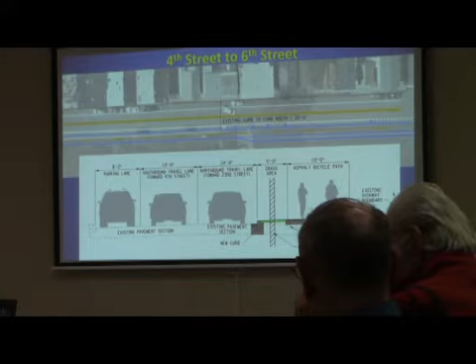Between 4th Street and 6th Street, the existing curb line on the east side of the road, we are planning on removing that and moving it closer to the west side. So you'll have a 5-foot grassed green space area. In that grassed area, National Grid will be relocating their poles that are along this stretch, and the bike path will actually be moved off to the side, so we'll have a good 5-foot separation and a curb between the travel lanes.

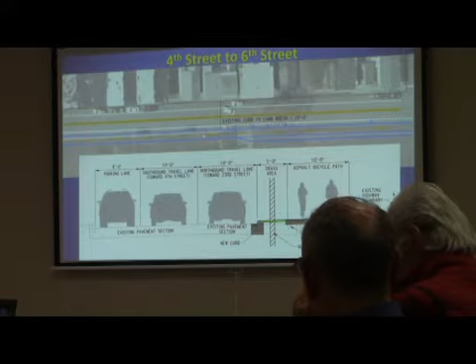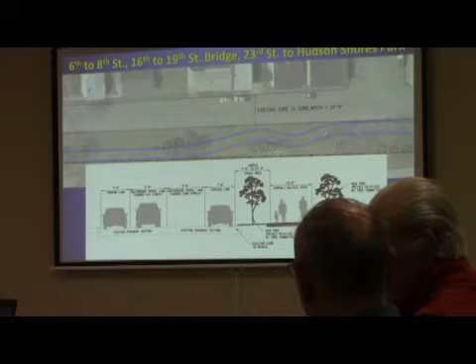This section that we're showing here encompasses a few segments of Broadway: between 6th Street and 8th Street, 16th Street and the 19th Street Bridge, and from 23rd Street to Hudson Shores Park. What we're trying to do in these segments is create a wider green space between Broadway and 787, so we're kind of snaking the trail through, trying to avoid as many trees as possible. Some trees have already been removed, and we've been working with the city's tree committee, and we will be replanting trees in the green spaces on either side of the trail, mainly in these 3 segments here. That's where the most green space is, and that's where the most plantings will be.

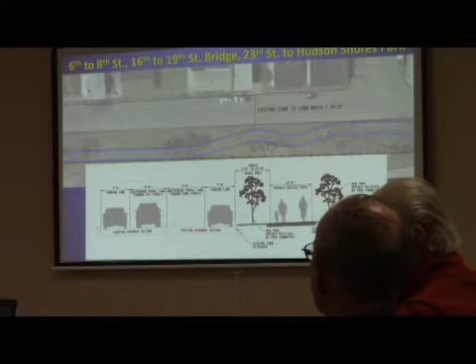We've worked with the tree committee to come up with 42 new trees that'll be spread out throughout, and the tree committee will come out. They'll select their preferred locations when the contractor's on site, and those will all be planted.

So on either side of the Arsenal property, 8th Street to the Arsenal and Arsenal to 16th Street, we will again be removing the existing curb that's out there and putting new curb in. That'll help us create a 5-foot buffer space between the new bike path and travel lanes.

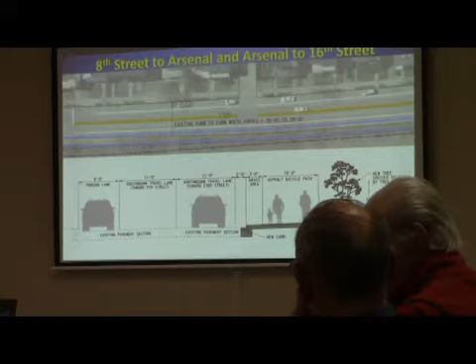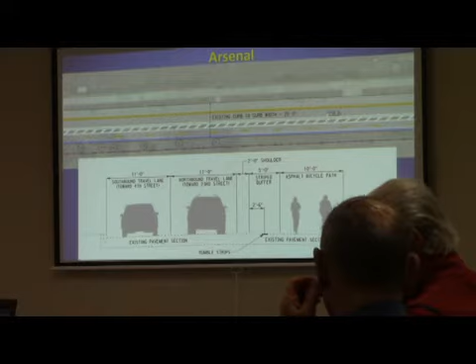In front of the Arsenal property, this is straightforward. There's no actual road work to be constructed here. We're using the existing roadway and basically shifting travel lanes closest to the Arsenal, so you'll continue to have 2 travel lanes, a nice 7-foot buffer space, and the bicycle path. No green space, no construction in front of here. This is all being created with striping on the road.

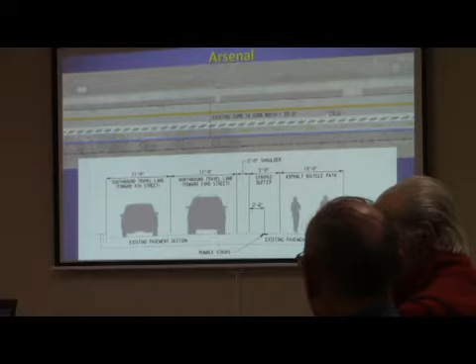And we're going to do a better job than we did on 2nd Avenue with the striping? Yes, but the striping on that is just the clarity or the type of stripe, or I guess it just, it's gone, worn off. All of the above, I guess it is. I can't even tell which. That's what I thought you might be.

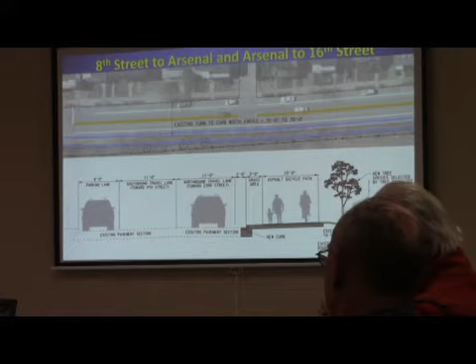In front of the Arsenal, I saw the last slide, it looked like between the bike path and 787 there's room for trees being planted, is that correct? On the previous one? Yes. How about on that area between the Arsenal, is there going to be trees, is there room, or is there going to be trees planted in that area? There is room if the tree committee selects there, but there is already trees along that frontage. The new ones, a lot of those are existing.

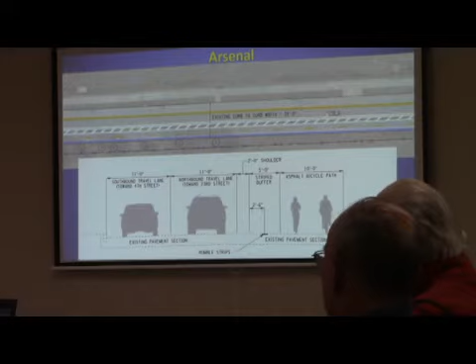Those are existing trees. And the tree committee is also planning on trying to work with the Arsenal to do the other side, the actual Arsenal side of Broadway. May I ask the council a question?

Is this a mandate of the state, this project mandated? It was applied for a while back, from what he said, 2013, and the city approved it back in 2013, yes, and you have to honor what's been approved. What I'm saying is, I'm certainly not in favor of a bike path on 2nd Avenue. There's enough traffic there as it is. Mr. Eubank, on Broadway.

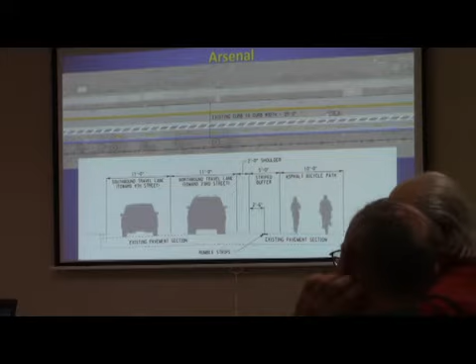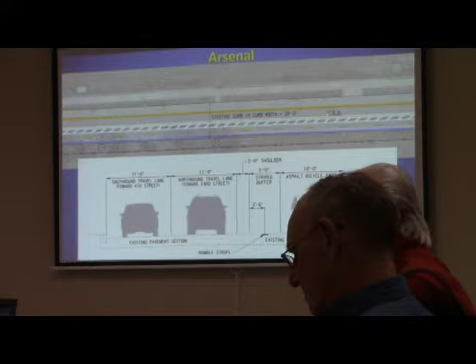Mr. Eubank? Yes. I'm going to cut you off because I don't want to interrupt the presentation. I understand your concerns, and we certainly want to hear them. I just don't know that right now is the right time to hear them. Well, let me ask the gentleman a question then. Yeah, well, they're here to do a presentation. I'd ask that you just give us the time to address this. We can have more public meetings if you need to. We're certainly open to that. I just don't think right now is the time to ask those questions. I'll honor that. Thank you. Okay, thanks.

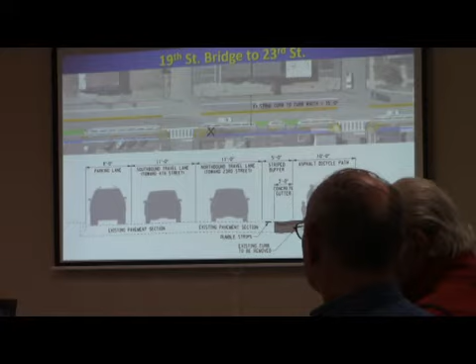Moving on to the 19th Street Bridge to 23rd Street. In this segment, to create the space to fit a bike path in, we will be installing a gutter, taking out the existing curb, which has little reveal at the moment, but installing an asphalt gutter. What's that word, reveal? It would be like the part of the curb that sticks above the pavement. Got it, sorry. Typically it's 6 inches, and when you pave a lot. Got it, okay. So to create space, we designed in a gutter.

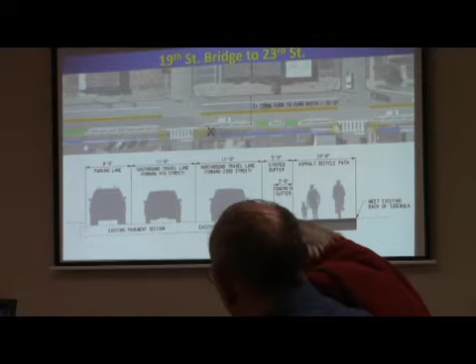The gutter will help stormwater stay on the road, and the bike path will be created up where the existing sidewalk is, working from the back of the sidewalk towards the road, and maintaining two lanes of vehicle travel and parking on the west side. So the gutter along the road is going to be blacktop? Yes - oh no, I'm sorry, concrete. That'll be concrete. Yeah, so it'll be differentiating. Because you did mention you said blacktop gutter. No, I just misspoke. Okay, all right.

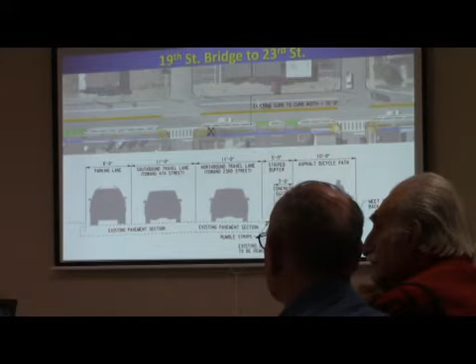Can we just back up to over here by City Hall with that curve? That's pretty narrow with 2 lanes, with the traffic. Is that coming out 5 feet also, like in front of the Arsenal? We can show that plan sheet after we go through these. We have the drawing on an aerial picture, so we can hone right in on that in a couple of minutes, we'll bring that up. Oh, okay. I mean, yeah, we're very much right there. Just give me a sec, I'll find it. These are the actual engineering drawings.

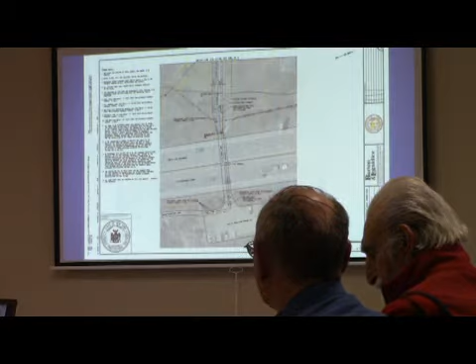Yeah, we're gonna, I believe there's one parking space.

So the bottom half of this is right out here, 15th Street intersection. Yeah, the pointer's not working, but we are pushing that curb line closer to City Hall to create the bike path on that side.

But we're also taking out about 8 feet of the median nose. The median has a nose to it, a round piece that sticks out into the intersection, and we're pulling that back about 8 feet. Because of sight distance, we've also eliminated a parking space right at the corner, where there's some hash striping. You can see a white car just underneath the striping on the aerial. By doing that, we were able to shift the movement of cars closer to City Hall and create the space needed to build the bike path on the opposite side.

Can I ask a question? With you taking that boulevard out and moving all the traffic lanes closer to City Hall, it's already really hard to come out from City Hall and see left or right with all the cars that are there. Is there anything you're planning on doing to increase the sight distance?

Which is why we removed the parking space at the corner. That one parking space? One on each side. That ain't gonna do nothing.

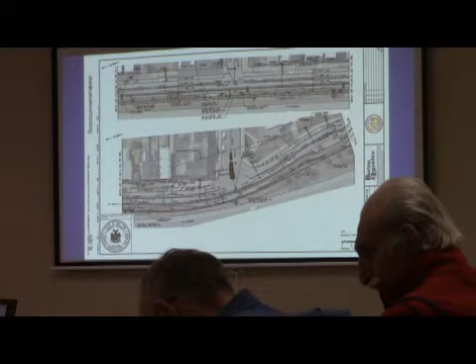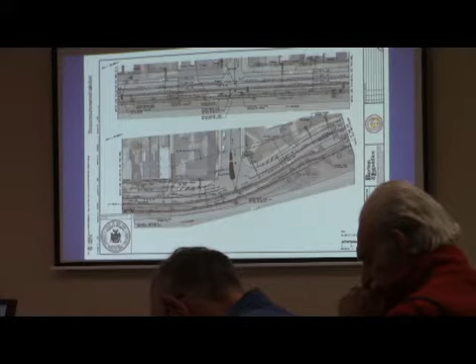And by removing the nose of the median, you're moving the lane back to where the median was. So now the person coming up has to stop even farther back and still can't see.

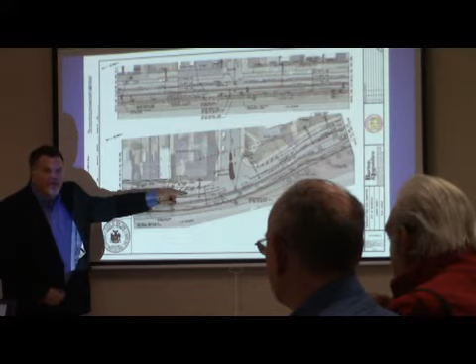To come out, yeah. This parking is coming out, so you'll be able to see a lot better. So these vehicles won't be here now, so when you're coming out, you can see a lot further down the road.

So are you planning on rebidding this again? Is that what you're doing? So you're taking the bid of 1.7? Yeah, I mean, if the contractor's paperwork is all in line. And who won that? Louise Brothers is the low bidder.

We did sit down with Mark and met with DOT. DOT administers the funding for this project, and we worked through the options. As long as the contractor's paperwork is in place, it's suggested we move ahead, recommending the award of the bid. If DOT sees something not right in the bidding, or feels the project doesn't warrant that expenditure, they'll usually recommend a rebid.

Sometimes that happens, and sometimes you also have to change the scope. It's possible some of the off-road segments would get put back on the road to reduce cost. But the project, as it stands on its merits, they're willing to fund the extra money. We've already gone from the original project scope of $500,000 to really 1.7. The original feasibility study done back then in a non-engineering aspect said it was $350,000. So, right on target, but looking at it today, from their perspective and handling the money through the federal government, it's warranted, which is a good thing.

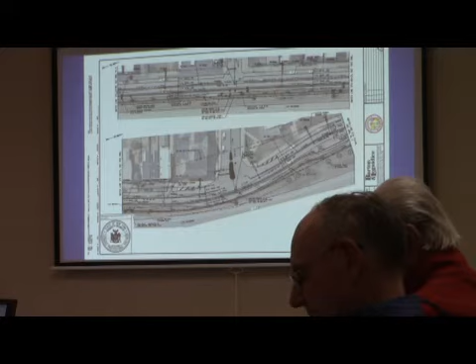Well, even though the project is called a bike path, it's actually a multi-use path, so bikes and pedestrians can use it. Yes, it'll be 10 feet wide instead of the 5 feet wide it is now, but it's not any closer to the houses than they are now. It goes from where it exists now back towards the road, so nobody's losing any front part of their property, except for where they park cars. Yes, we'll go with the residents that live there.

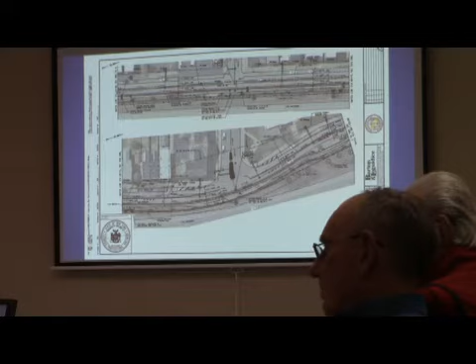Reducing the right turn lane at the intersection? That'll still be there. Can you go back to 4th Street, where you come out of the bike path? You go right down the street, then up onto the grass? 4th Street, here? Right, okay.

Pasnell Payne is there. Are you going up on Pasnell Payne's property? No, you're going to go out onto the street, then go down the street till you get past Pasnell Payne, then up onto the grass? Yes. So as part of that funding for right-of-way acquisition to come in, there's no right-of-way needed.

No issues or anything with right-of-way. You avoided that, good. Yep, that was a fluke.

Will there be parking along the 787 side, east side, from Pasnell Payne to the Arsenal wall, from about 6th Street to the Arsenal? The bike path will be off-road, so parking will stay as it is now.

But what about the parking at 4th Street? So you're taking away the 6 parking spaces that are there? Yes, for the segment between 4th Street and in front of Pasnell Payne, on the east side.

Do the residents down there know that, or does it just not matter? That was part of the public information meeting that we had. We hope everybody's here to talk about it, so that was covered at that point.

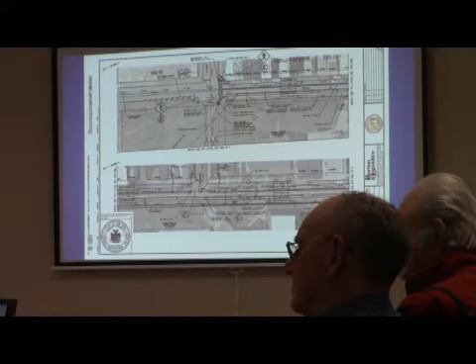Can you explain what's happening at 23rd Street? Does it just stop, or does it hook up with the bike path or the park? We kind of focused on Broadway here.

So when you get up to 23rd, we parallel 23rd and cross over the 787 on-ramps. That is the bottom portion of that figure, so those yellow X's - currently there's a path that goes through there with crosswalks halfway up the ramps, and we're removing those as part of this project.

Crosswalks will be up on the road like a normal standard intersection. And we are continuing on, and when we cross the off-ramp, we go through an existing gate and hook up to where the parking area is in the park.

So that's 23rd Street right there, and that's the off-ramp from the park.

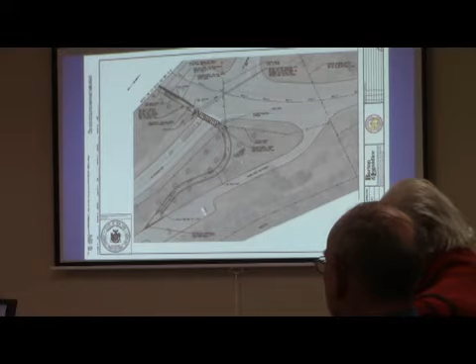Okay, thanks. So you're raising the off-ramp and on-ramp walkways up farther onto the ramp - is that what you said? Other way around, we moved it closer to the road, to act like a crossing closer to the road.

So now when I'm walking across the road, are cars going to just stop in the middle of the intersection? Well, it's better than the current situation where they're accelerating up to the crosswalk. So yes, and the tendency will be for people not to enter the ramp while someone's in the crosswalk, instead of already being out on there.

So the existing crosswalk as it is today is right here - this is the new crosswalk. Which hardly was ever used because it's shorter distances to go straight.

And long-term, is the goal to hook this up with the bike path in Cohoes and Colonie, and that goes out to Niskayuna? So this is part of one of the open connections for the Empire State Trail, which continues on to Green Island.

And I'm assuming the town of Colonie is going through the same thing we are right now, and the city of Cohoes is going through the same thing? We just did the Black Bridge Trail for Green Island - the bridge and park.

Would this eventually involve Blackbridge? That is the Empire State Trail connection - how Green Island gets between A and B is...

Green Island is actually doing a road project from Hudson Shores Park all the way down Lower Hudson, which is shared use, on-road the whole way. That'll connect from here, in theory, right?

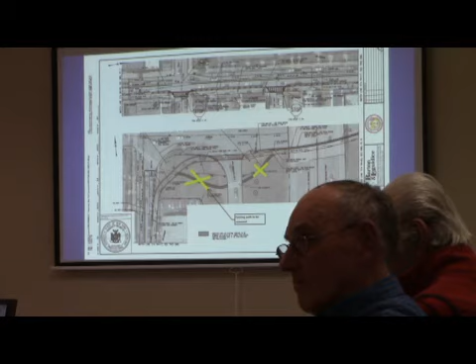Yeah, they don't really last after winter time, with plowing and cold temperatures. So in those areas we have rumble strips proposed. One thing about that, for traffic and highway engineers, is if someone's not paying attention while driving, they might start hitting those markers without even noticing them, but you will notice a rumble strip without having to look. That's the comparison I like to use. If you're in a truck, you could be running right over markers without knowing, but you'll feel a rumble strip even if you don't see it. So that's what we're planning on using, based on input from the last meeting.

So thank you. Thank you. Yes, thanks guys, appreciate it. Thank you very much.

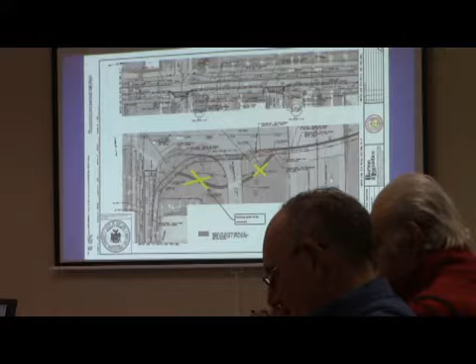Your Honor, the first order of business is ordinance number 2021. Before I read this, I'd like to bring to your attention there is a language change regarding the swearing in of Joe LaCivita as the new general manager of the city. Mark Spain is now the deputy general manager, so that will be read with that title included. Ordinance number 2021: the council of the city of Watervliet hereby authorizes and directs Deputy General Manager Mark J. Spain to dispose of those surplus vehicles which have been determined to no longer be needed for municipal purposes and which are of no benefit to the city of Watervliet.

Mayor, I make a motion that we move on the ordinance. I'll second that. Discussion?

So this is a list of several vehicles that are no longer used by any of the departments in the city of Watervliet. They obviously now hold no resale value. We've put them out for bid and there are no bidders on any of the vehicles. So our next step is to contact a tow company to bring them to a scrap yard and scrap them for the scrap metal. We already have a relationship with Dawson's Towing, so we're just going to use that relationship for them to transport the cars.

We have 3 at Hudson Shores Park - there's 2 police cars, an old pumper, and an old SUV behind the fire department, and there's 3 vehicles up at the water filtration plant. All those vehicles will be removed hopefully within the next few days and brought to the scrapyard.